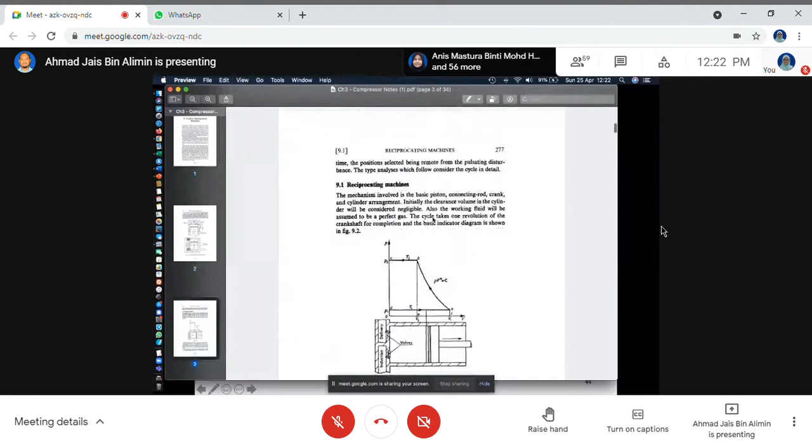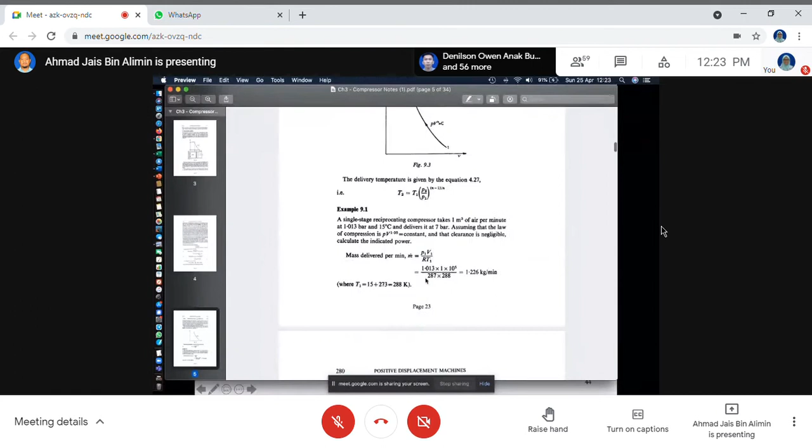So all the content from the slides are taken from this book, this chapter. So it's better that you download this specific chapter, because what is good about this book is that it gives you the kind of example that usually will take place during the test and examination.

Okay, here example 9.1 from the book is the same as the example shown in the latest slide, and like I said, most of the tests and exams will revolve on the same concept of question. Okay, any questions? Anything? No checks, right?

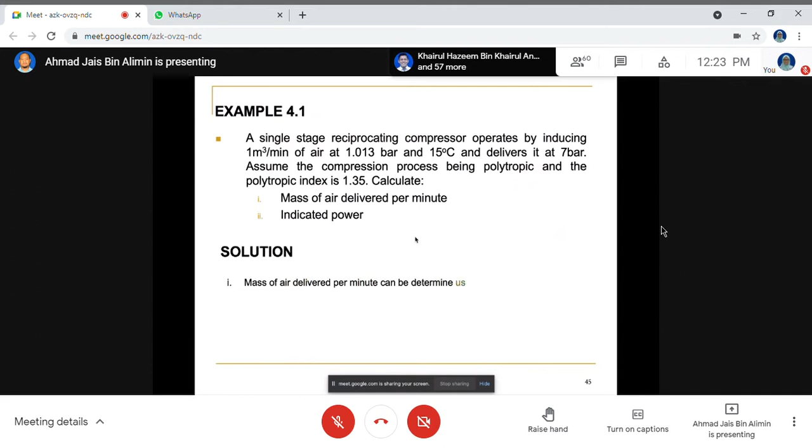So example 4.1. Just to highlight a bit on the example: here you have a single stage, okay, and then you have the volumetric flow rate, and then you have the pressure. Sometimes you have pressure in kilopascal, or sometimes in psi and so on. So you know this will be the pressure that you're going to work on, and this is the temperature.

Okay, and then a reminder again, the temperature you need to convert to Kelvin. Okay, so simply add 273. So you're going to have 288 Kelvin as the temperature. And then this is the required delivery pressure. So it starts off with this pressure, and then the outcome from the compressor, this is the required pressure out.

So because you have the compressor operating at this volumetric flow rate, then you need to work out what will be the mass delivered per minute.

Okay, and in this example, the assumption is given that the process is following the polytropic conditions, and the polytropic index is given. In the situation where you are not given the polytropic index, you can make assumptions using the values obtained from the tables. They usually assume that an index between 1.35 to 1.4 will be acceptable, as long as you put it in your answer script.

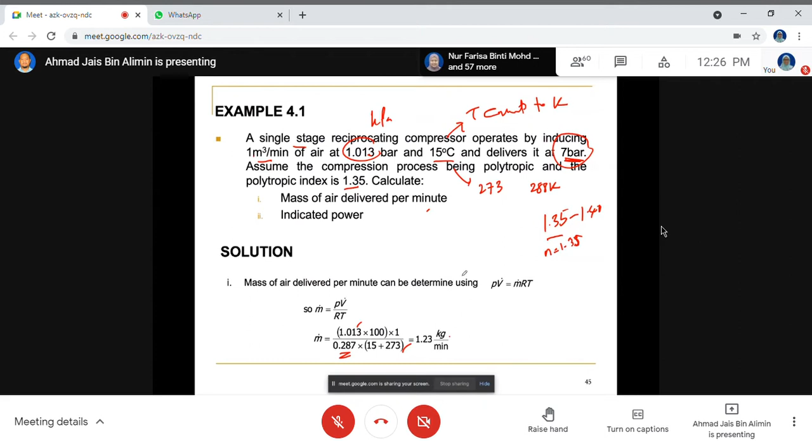So here, use the gas constant, the R value, the pressure, okay, and then what else? And then you do the temperature, so you can work out this is the mass of air delivered per minute. Okay.

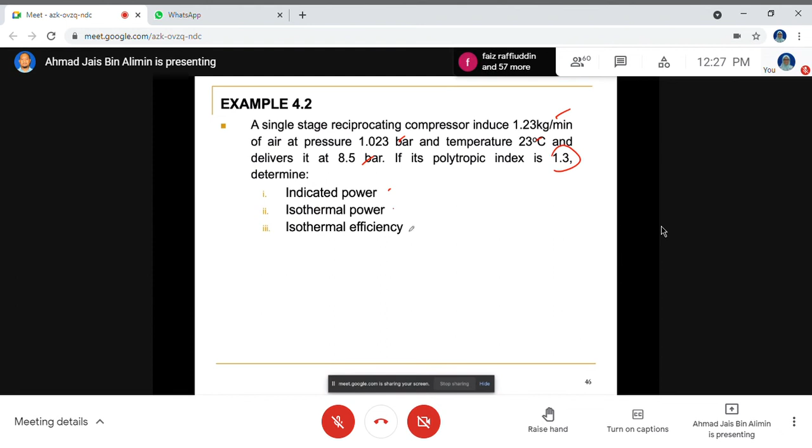Okay, in this next example, you already have the mass air flow rate, the initial pressure, the temperature, and the required pressure, with the index at 1.3. So you need to calculate the indicated power, isothermal power, and then the isothermal efficiency.

Okay, so you know the flow rate and the temperature, so you can use this equation. In the test and exam, all the equations relating to that particular chapter are included.

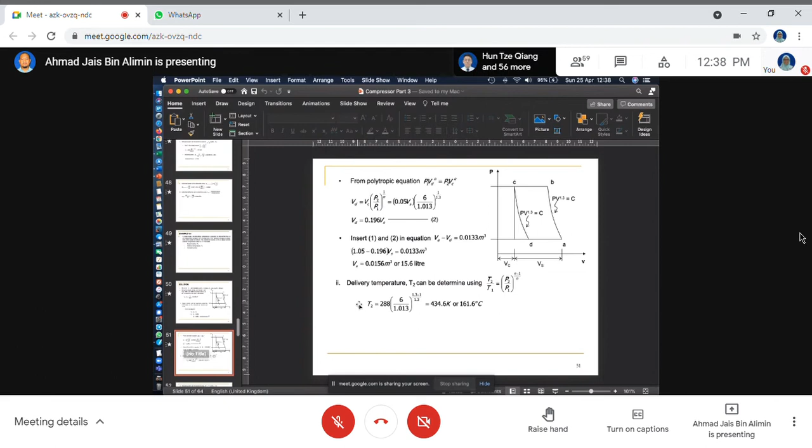Contoh logical, kalau T1 ialah 15 Celsius, bila awak dah hantar udara termampat, suhu dia mesti meningkat. So pastikan tak terbalik, kadang-kadang terbalik kat sini. Sometimes students put it the other way around. So T1 over T2 equal to P2 over P1. So you can, but you must make sure that you select the right equations.

Okay, indicated power again using the equation here, you key in the values. A note here, since the double acting, then you need to multiply by 2. Sebab apa? Sebab dia pergi, piston tu pergi kiri pun dia hantar udara termampat. Bila dia patah balik ke kanan pun dia hantar udara termampat. Kalau single acting, dia pergi satu hala, baru dia hantar, dia patah balik, dia cuma ada suction. Dan bila dia double acting, penghantaran ke kiri akan menyebabkan ada suction di sebelah kanan, dan bila udara sebelah kanan pun dia mampatkan, sebelah kiri pula dia akan initiate suction. Okay, ini persamaan guna ni dapatkan dia punya indicated power and then you work out the mass flow rate.

Okay, single acting, induction pressure. Doktor, maaf, boleh ke kalau kita slow sikit sebab laju doktor? Saya lost lah. Okay.

Okay, dia example banyak. Dia contoh sebenarnya sama juga, single stage, single acting. Single acting bermaksud bila piston tu pergi ke satu direction, satu side saja yang akan membuat penghantaran udara termampat.

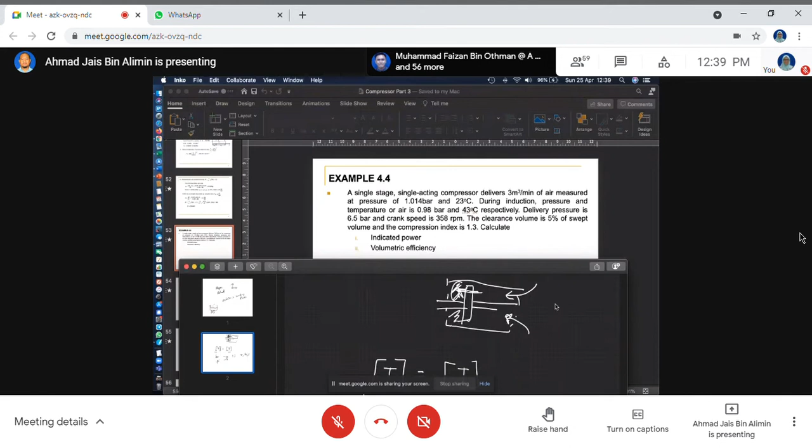So bila dah termampat, dah hantar, piston tu pergi kanan pula kan. So bila pergi kanan, dia akan mampatkan sebelah sini dan induction sini pula berlaku. So ni masukkan double acting. So bila itu yang diberikan dalam soalan atau sebagainya, kena ingat bahawa setiap kali kitaran berlaku, ada 2 kali proses penyedutan dan pemampatan berlaku.

In this example, the quantity of compressed air that needs to be produced is 3 meter cube per minute. Initial stage: 1 bar, temperature 23 Celsius. During induction, pressure and temperature of air is 0.98 bar, 43 degrees Celsius. Delivery pressure is 6.5 bar. The crank speed is 358 revolution per minute. The clearance volume is 5% of the swept volume and the compression index is 1.3.

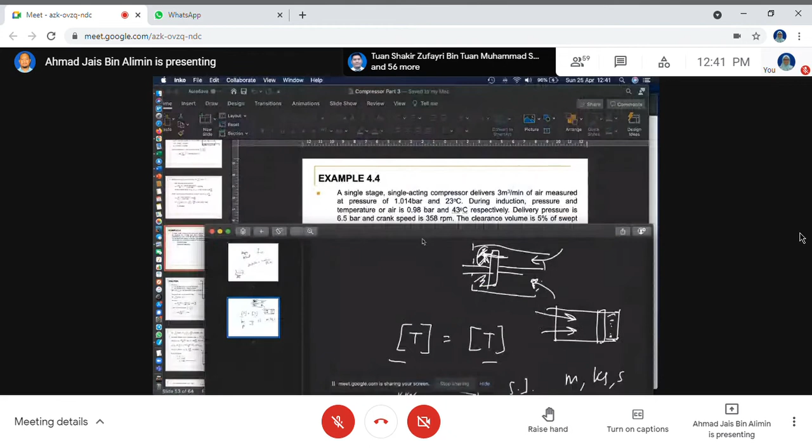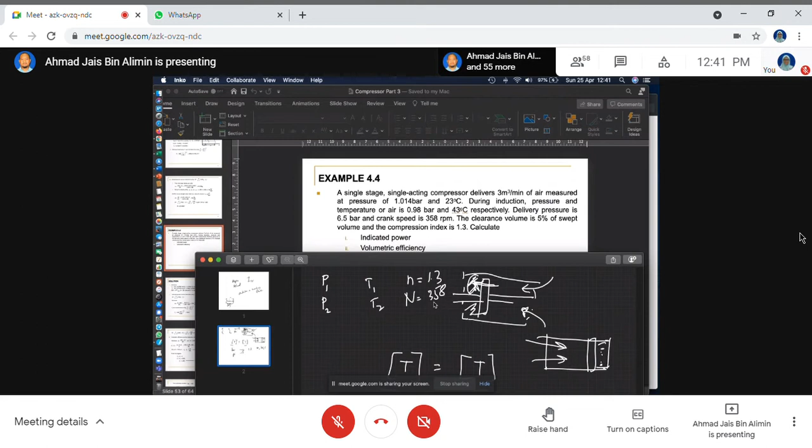When you get a question like this, another step you can take is to list all the relevant information. So there's a habit: P1, P2, T1, T2, n small, and N big. n small is the index, 1.3 in this example. N big is the revolution per minute or the rotation value, which in this case is 358, and it's good practice since this data is given in revolution per minute.

Like I said earlier, when you're talking about converting to watts - watts is joule per second. So joule depends on, the best way to remember it is half mv squared. So you know we're talking about mass multiplied by velocity, which is mass times meter per second square. So this is the basic definition for joule: meter per second square, meter square per second square, where m is mass. This is in SI units like I mentioned.

So to convert to watts you need to divide by second, S. So it's good practice that when you're given the value of the revolution of the compressor, straight away you convert from revolution per minute to revolution per second.

So here is 358 RPM. You put it on top of the paper, that is equal to 358 per 60. So that you get it in cycles per second. 358 divided by 60, so you get 5.97 revolution per second. Because later if the question demands it, they will ask you to double check that you've already converted to per second, so that you can convert to joule per second if required in the question.

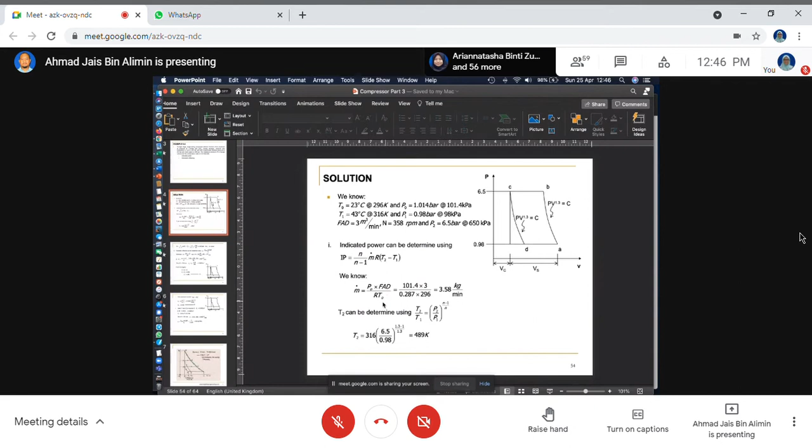So here you use the equation of indicated power and then you work out - we know that the delivered volume is 3 meter cube per minute. The compressor delivers, meaning the compressor has already sent it out.

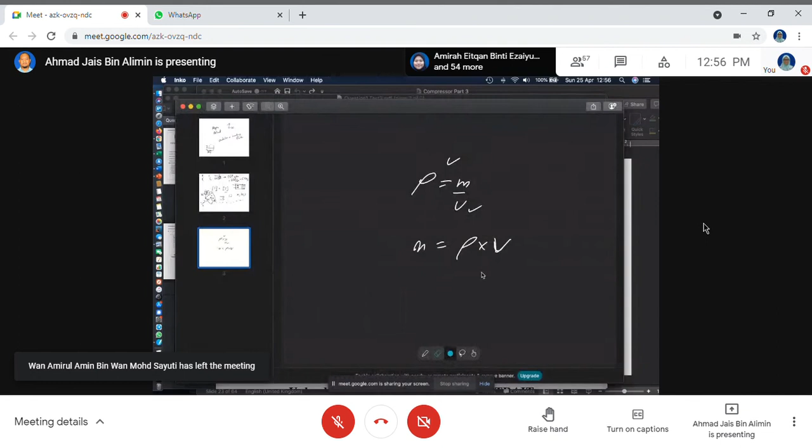Bore and stroke. Dalam soalan exam ataupun test yang bagi kerja lebih sikit kepada pelajar. So ni adalah silinder.

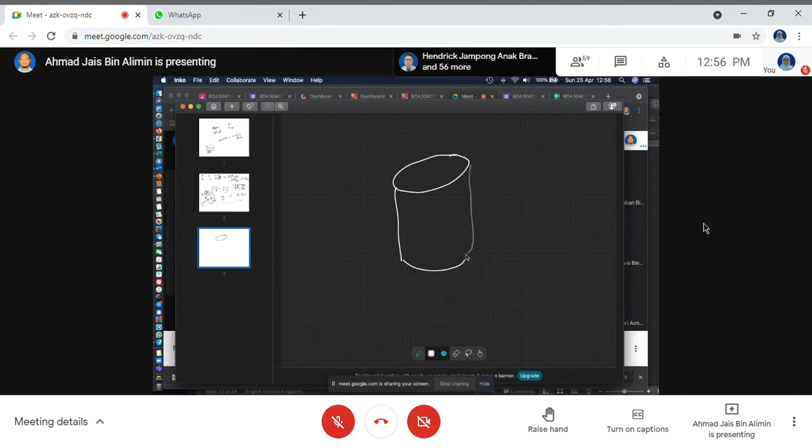Every time piston tu, piston dia akan, kalau tengok pada ni almost isometric view lah. Kalau tengok daripada pandangan sisi, basically it's a vertical shape lah. So piston head tersimplifikan dalam satu plate ni, dia akan kat sini.

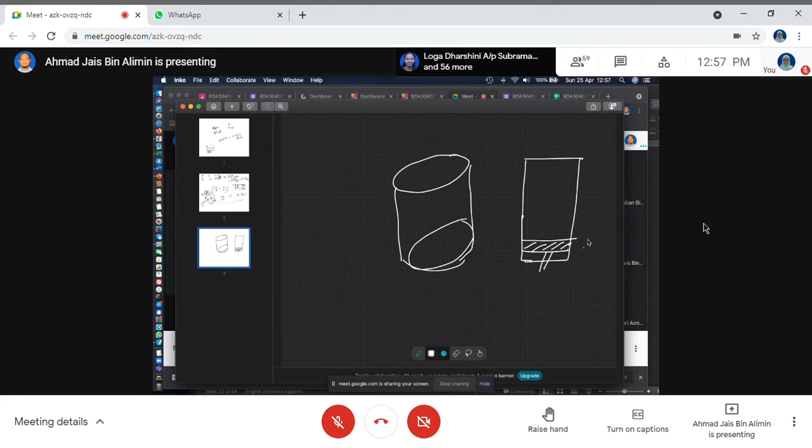So dia akan naik turun lah. So ni ada dia punya connecting rod. So piston naik, akan mampat, nanti dah sampai ke atas ni, dah hantar udara tu mampat, so ni akan turun balik.

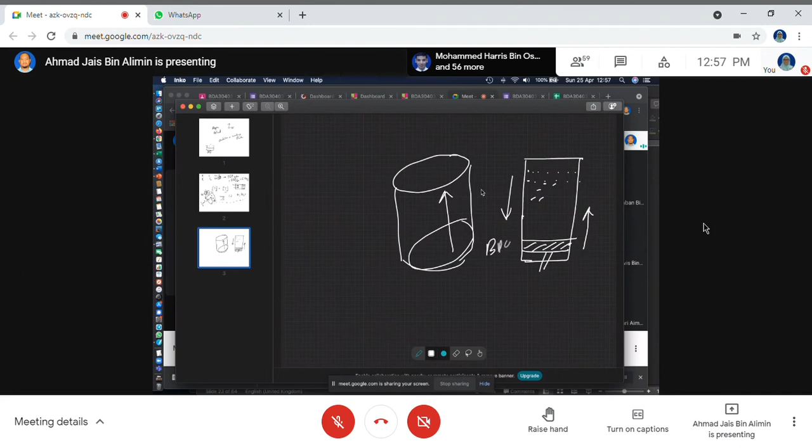So stroke lah, stroke. Pergerakan daripada the bottom dead center ke top dead center itu dipanggil satu stroke lah, satu lejang. Okay, bahasa Melayu dia lejang, so English dia stroke. So pergerakan tu ialah stroke.

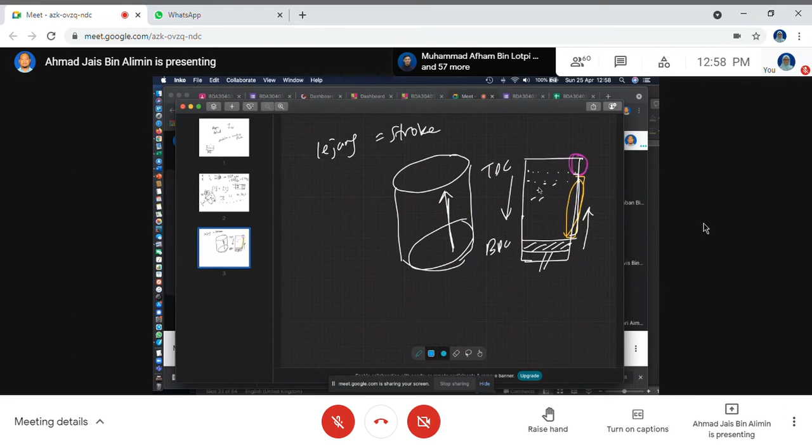Swept volume ialah volume yang ini. Let me use different color. Swept volume ialah volume yang ini. Yang ini pula ialah clearance volume. Dan ini adalah total volume. So biru total volume, kuning ialah swept volume, pink, purplish. Pink atau purple ni adalah clearance volume.

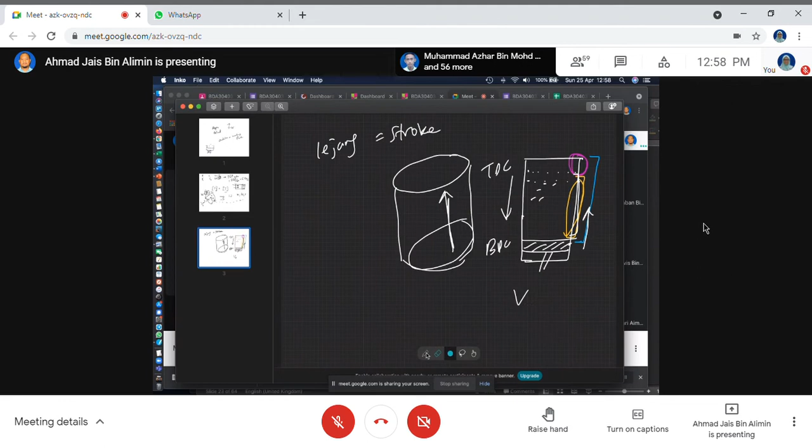So what we have then is the total volume. Total volume is equal to the clearance volume plus swept volume.

So bila pemampatan tu dibuat, so dia mesti ada, sebab dia silinder kan, saya tahu dia punya diameter. Okay, so diameter, nama lain dia ialah bore.

Stroke ialah merujuk kepada jarak pergerakan daripada top dead center pergi ke bottom dead center.

Sebabkan clearance volume ni tak berubah, ni clearance volume, so piston dia tak akan pergi masuk area ni. So piston cuma akan berlegar di antara BDC sini ke TDC sini. So ni piston, ni kulit piston. So ini adalah jarak yang kuning ni, jarak yang piston tu akan bergerak. So jarak itu dipanggil stroke.

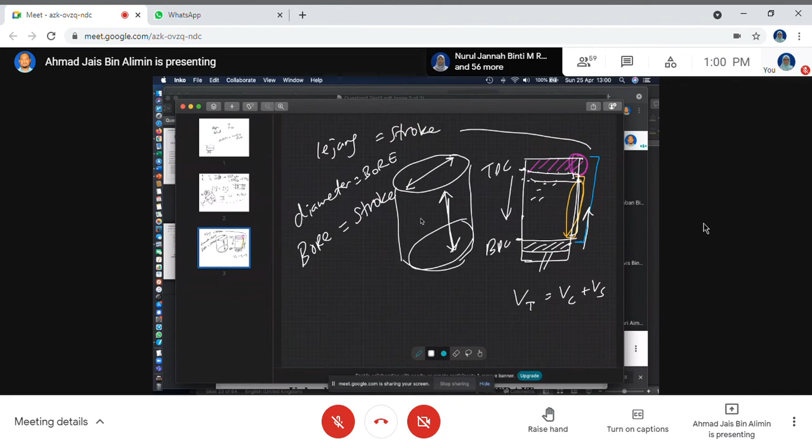So bila dinyatakan dalam soalan ataupun pernyataan, dalam soalan ni tu the bore and stroke are equal. So bore sama stroke. So maksud diameter dan juga jarak perjalanan di antara pembukaan piston ke titik akhir atas tu adalah sama. So kalau yang kuning ni nilai dia katakanlah 100 mm, so bermaksud nilai diameter dia 100 mm juga. Okay, so bore equal to stroke.

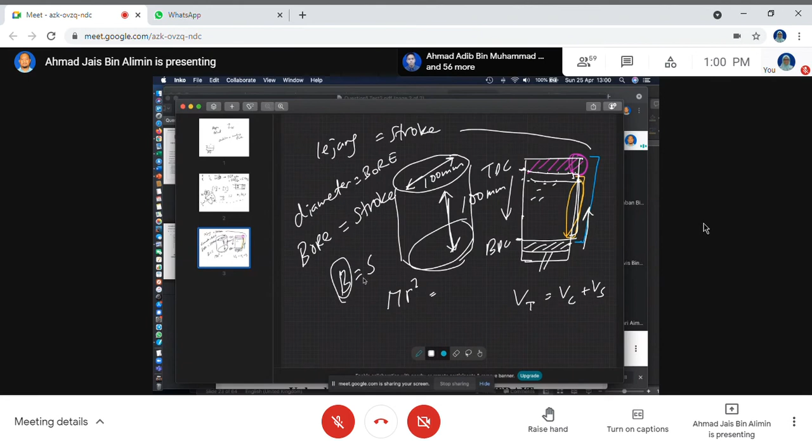And then kenapa nak tahu ni, sebab nanti kita kena tahu kadang-kadang dengan kira nilai stroke kan. So you know the area is equal to pi r squared. So you can work out the, kadang-kadang soalan tu minta untuk kirakan nilai, apakah nilai diameter, apakah nilai radius. So kalau dia kata bore equal to stroke, so you know this is scenario, and then you know that this is the volume that you are working with.

Show the process in PV diagram, calculate the free air delivery in meter cube per minute, calculate the volumetric efficiency, and calculate the bore and stroke of the compressor.

Okay, ini unfortunately masa ni sebab online dan tak ada persamaan disediakan. Tapi sebab kita tahu student pun dia prepare lebih, jadi siap-siap print out kan ataupun ada buka handphone ataupun laptop ataupun buka screen untuk tunjukkan persamaan. So you need to have those in access lah, yang boleh diakses.

So what will be the solution?

Boleh nampak, so boleh dah.

Describe the term free air delivery. Free air delivery is the actual volume of air in use or delivered, measured at free air temperature and pressure.

Apa maksud free air temperature and pressure? Maksudnya bila pengantaran tu dah hantar, yang bertekanan dalam ni, tapi kat luar ni dia adalah tekanan ambient. Di luar pompa semua adalah tekanan yang ambient. So bila dah dia hantar untuk kembali tu keluar daripada sistem tu pada free air pressure and temperature, apakah isi padu yang dihasilkan? Sebab kalau dia double acting, kalau dia ada two stage, dia akan sedut banyak daripada berapa yang dah dihantar.

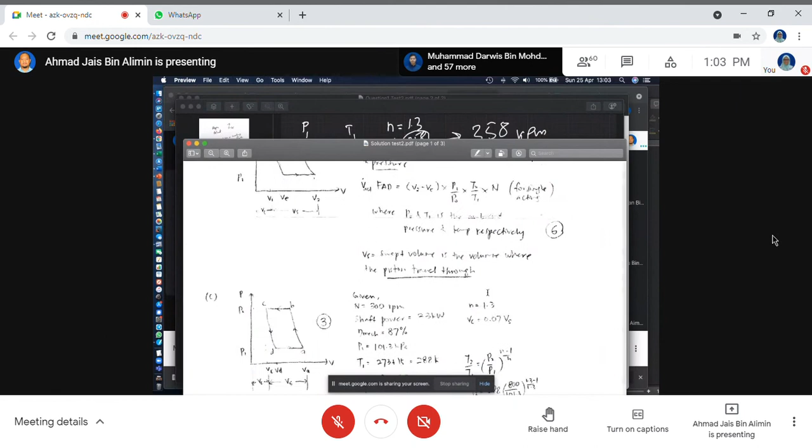Okay, so dalam soalan ini diberikan, so you buat sketch PV diagram. And then using the equation for single acting, swept volume is the volume where the piston travel through.

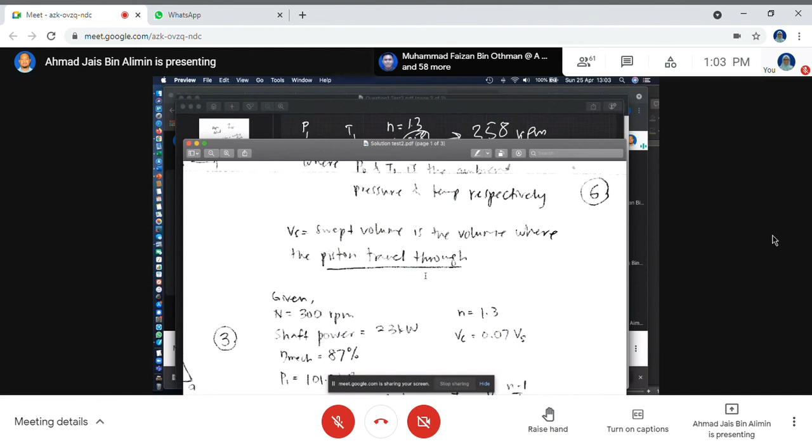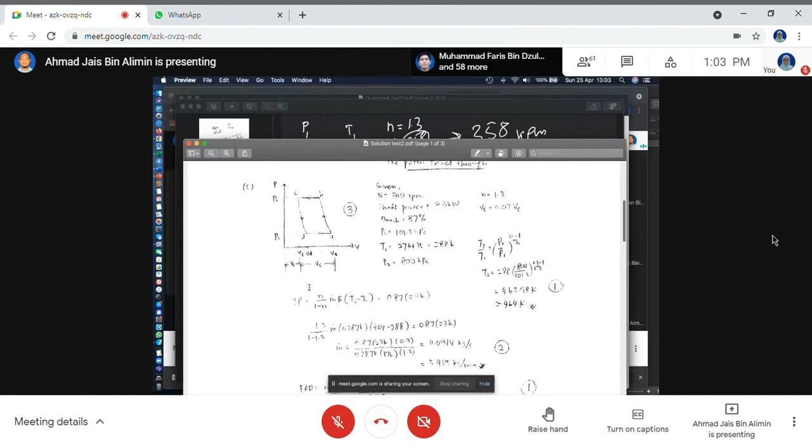Tadi itulah, yang kuning tu. Maknanya piston tu dia tak sampai ke atas, sebab dalam kes ni dia ada clearance volume, so tak boleh lajak ke atas. And then shaft power is given here, mechanical efficiency, temperature in Kelvin. So you buat sketch yang ni, tunjukkan ada clearance volume, ada swept volume.

Guna persamaan yang sama ni, indicated power. Efficiency.

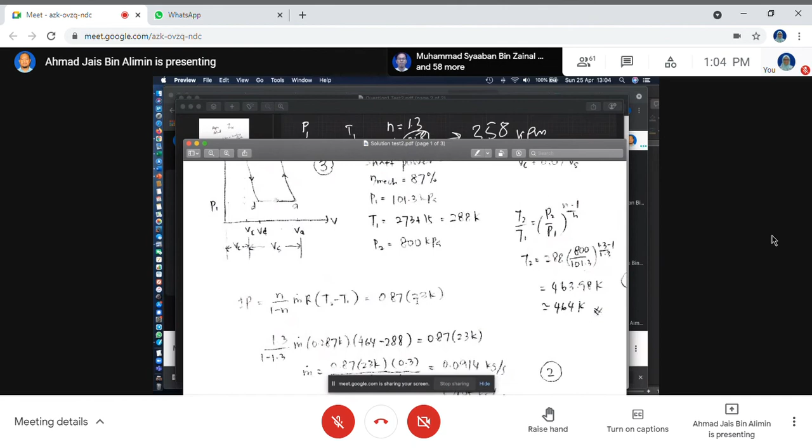Dalam cara penyelesaian ni, sebelah kiri ni, sebelah kanan ni, so udara tu kenapa dalam soalan tu ada indicated power? Mana tadi? Dia kata kat sini, mechanical efficiency of the drive between motor and compressor is 87%. So cekapan mechanical dia 87%.

Dan nilai kuasa terhasil ialah nilai kuasa yang diperlukan untuk menggerakkan pompa tu ialah 23 kW.

So bermaksud kalau kecekapan mechanical dia 100%, kita boleh kata 23 kW digunakan untuk menghantar udara termampat untuk sistem ini. Tapi sebabkan dia ada ketidakcekapan, so 87% daripada kuasa yang menggerakkan motor ni digunakan untuk menghasilkan udara termampat.

So saya boleh buat persamaan ini, boleh kata kalau dalam contoh sebelum ni kita cuma tahu indicated power je, sebab kita tak tahu sistem tu digerakkan oleh enjin ke, digerakkan oleh electric motor ke dan sebagainya. Dalam kes ni sebab kita tahu sistem pemampat tu digerakkan oleh electric motor, so we can use the power being used for the electric motor as the power that is responsible to deliver the compressed air.

Okay. Dalam soalan ni beza dia ialah soalan ni memberitahu siap-siap apakah power atau kuasa yang diperlukan untuk menghasilkan udara termampat. Tapi yang tak ada ialah kadar alir udara. So itu contoh dia dalam yang ni. Lepas yang lain tu masuk balik dalam persamaan, dan okay.

Yang keempat, calculate the bore and stroke of the compressor. Dalam soalan nyatakan bahawa bore and stroke are equal. So you selesaikan tadi.

Swept volume, given that dalam persamaan ni lecturer guna istilah bore sebagai D, stroke ialah H, diameter, height. Atau boleh pakai B and S, bore and stroke. So diameter and height dalam kes ni, diameter and height is equal.

And then the swept volume is given by this equation. Sebab kita tahu bahawa nilai clearance volume ialah 7%. So selesaikan persamaan tu, dapatlah dia punya nilai dalam milimeter.

Daripada ni, that's why sebelum ni mungkin diberitahu, mungkin ada student tak perasan. So bila dapat soalan macam ni, tengok sampai habis apa maklumat yang diberikan. Kalau ada soalan macam ni, bermaksud mungkin nanti akhirnya kena kira nilai bore and stroke atau kadang-kadang kena diminta.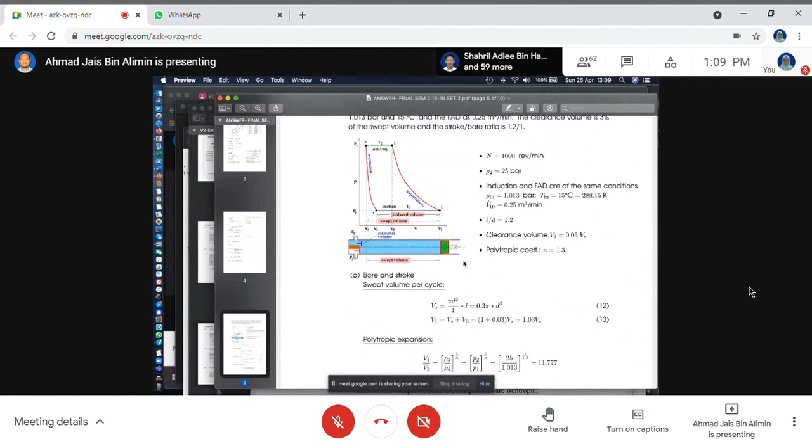And then the good thing about thermodynamics is that the questions are basically repeatable. They repeat, so you can make a guess what kind of question you're going to get. So these are the scheme, the answer scheme for that particular questions.